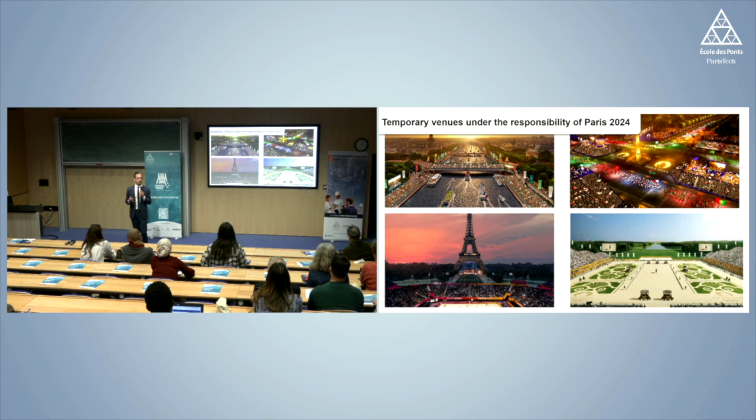So, for instance, along the Seine, we will have a lot of seats around the Concorde, around the Eiffel Tower. Those we don't do because they're temporary. So the organizers are doing that. We're only building whatever is permanent.

So those are the 70 projects I talked about, 4 billion euros, and half of that budget is the athletes' village in the middle. And that village is where all the athletes are going to stay during the games, and it's half of our budget.

We were created in 2017, and we're going to disappear in 2025. So we had about 6 years to do this, to spend that money, and I think it's about a third of the time that would normally be required to build so much. So it's been a lot of work, and we are going to disappear at the end of 2025.

We have about 2 years, a year and a half of reconversion to repurpose all those sites after the games for their long-term lives. I already talked about that, 4 billion euros of budget. About half of that is public money, the rest is private financing.

And we have a very complicated ecosystem, I would say French style. So we have 13 different public sources of financing, and then, as I said, about 30 project owners, because we didn't do everything ourselves, we delegated some.

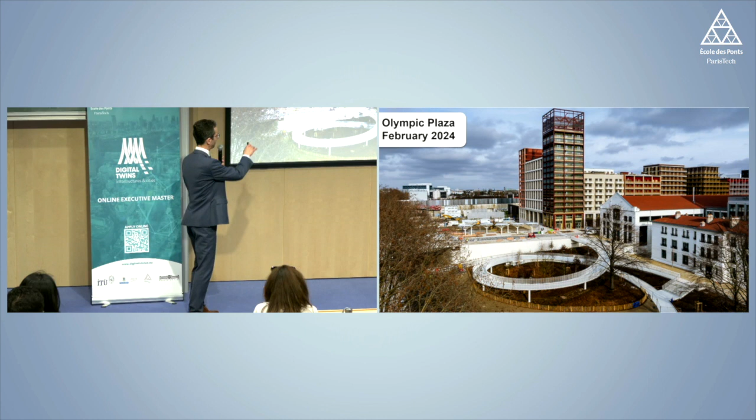So we built the entire village. That's part of the village here, and I like this picture because the topography of the site is very complicated. We have 15 meters of difference between the Rue d'Ampère and the Seine, and using the BIM CIM model, we were able to make sure that all the public spaces built were perfectly accessible to people with a disability.

And we decided to build a ramp here, and this is going to be the most famous part of the village. It's the Olympic Plaza, and we designed it to make sure that the path that's accessible is the nice path. So we put the money where we wanted everyone to go, including people with a disability. And you see it here on this ramp. So it's done. You have a couple of pictures here. That's just for the fun.

We have a couple of innovative features in our public spaces, and one of them is an air filter. We're filtering the air, we're not very far from the highway, to remove the smallest particles from the air, to try to create volumes of public space that have been depolluted.

We built a second village. It's in Dugny and Le Bourget, also in the northern suburbs of Paris. So it's here. And we're going to host here the media, the technicians who are in charge of broadcasting. You see a drone view of the village. Again, there was nothing 4 years ago.

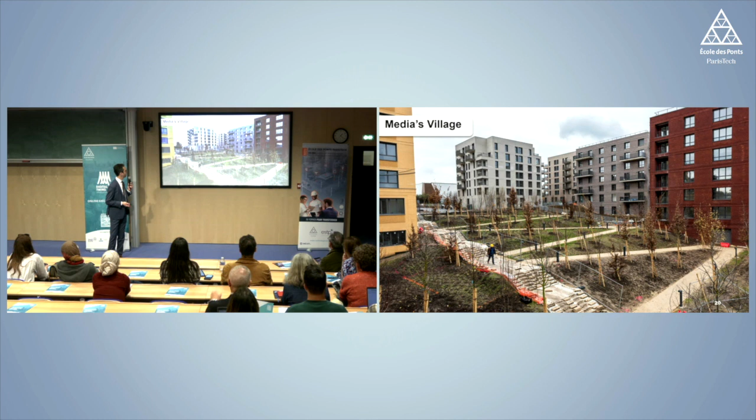We also have to build. This is in the Le Bourget airport, and this is going to be the broadcasting center that we also built for the games. And then a lot of competition sites. Arena Porte de la Chapelle was just finished last month, and you will see, here. So again, built from scratch. It's going to be for basketball during and after the games.

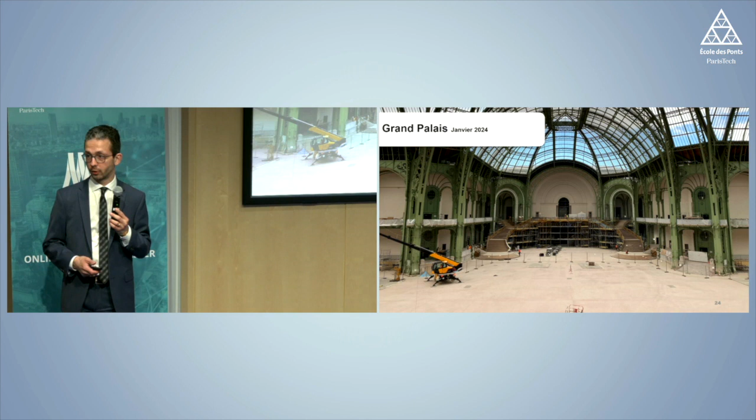The Grand Palais is under renovation, another competition site. It's not quite finished. It's going to be finished in a couple weeks. In Marseille, we built a couple new buildings to host the sailing competitions. And then very famously, we just finished the Olympic Aquatic Center across the highway from the Stade de France.

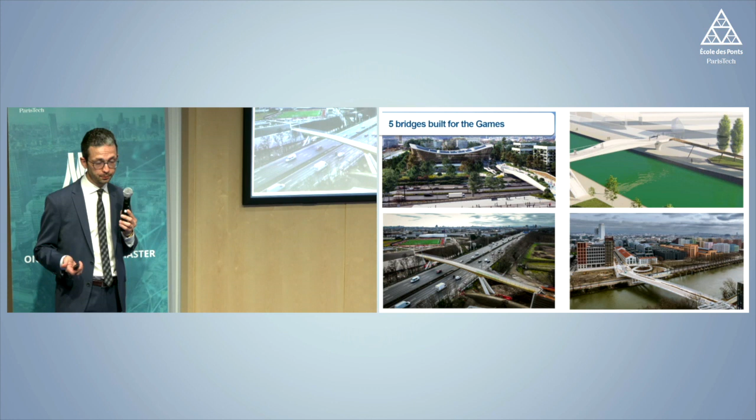And then we built a lot of other things, 8 swimming pools, mostly for training, because all the athletes have to train right before the site to warm up. We built several bridges. My favorite one is this one here. I think it's the first bridge in France made out of wood over a highway.

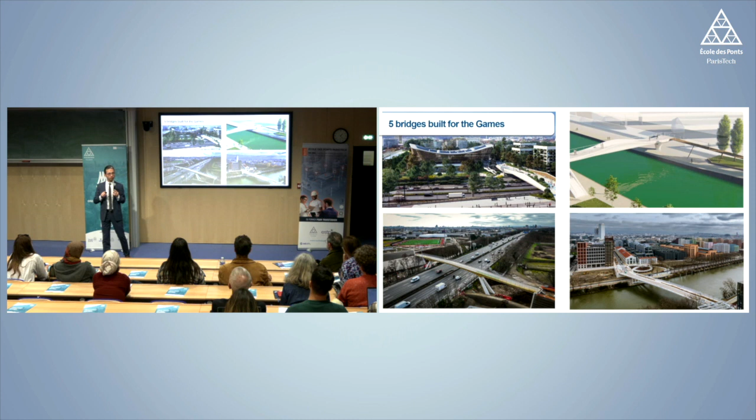Well, and how do we build this? So we built all of that in just 4 years. So here you have the athletes' village total, so the 40 buildings. And we had very high environmental ambitions, which we organize in 4 different aspects. And the first one is carbon neutrality. Well, it's the same thing. 4 different ways to reach our environmental goals.

The first way is that we have a reduction of about 50% of our carbon emissions. And we're going to talk about that. The BIM and CIM models that we use helped us make sure that the reduction in material consumption was enough to reach that level. And we also use a lot of wood, natural materials. All the buildings under 28 meters were built using wood, usually the structures or the frames and the floors.

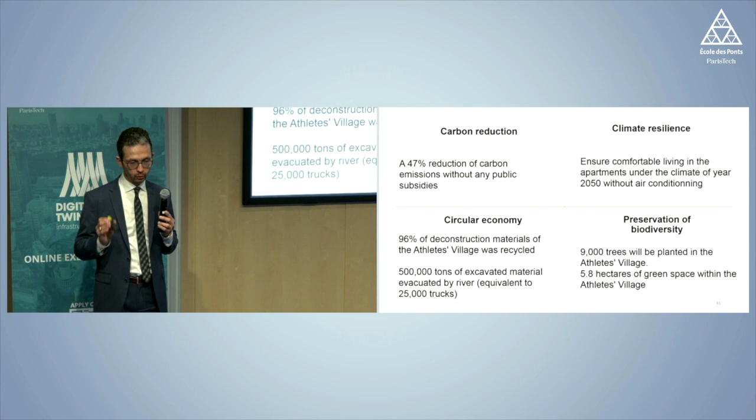Climate resilience, we had to make sure that we were building apartments that would be comfortable places to live in during the games, but also after the games. And Alexandre will also talk about that. We did a simulation to make sure that under 2050 climates, the apartments would be comfortable places to live in without air conditioning. We reused 96% of the deconstruction material, and we planted several thousand trees.

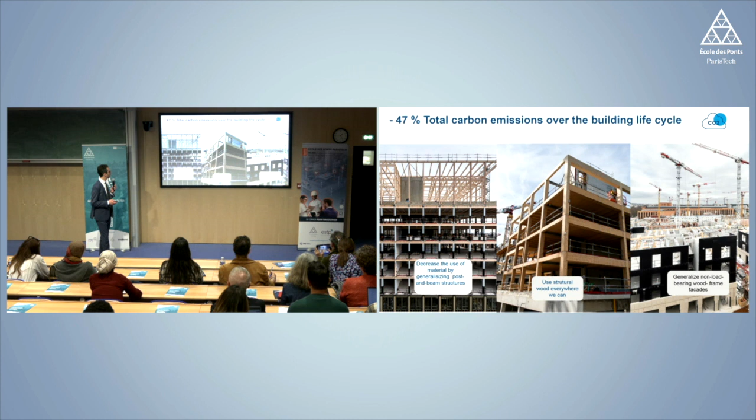So you see some of the buildings. That was a year and a half ago on the Athletes Village. You see the wooden structures of the buildings. We use ultra low carbon concrete when wood was not an option. We produced concrete on site to make sure that we had as few trucks as possible, even though there were 500 of them per day. And we built 10 kilometers of underground cooling, water and heating system. We went to get naturally cool water 70 meters underground.

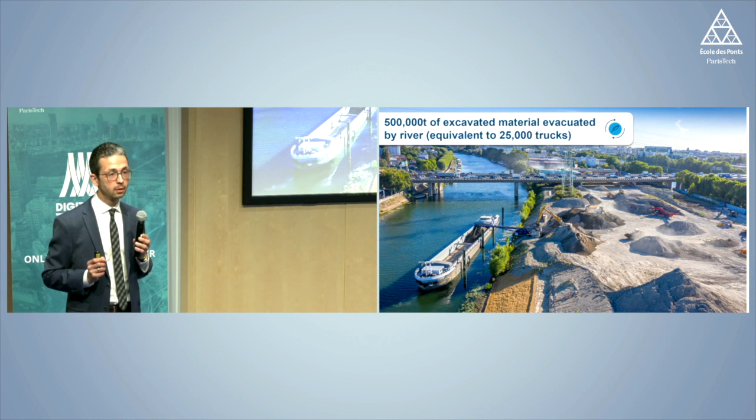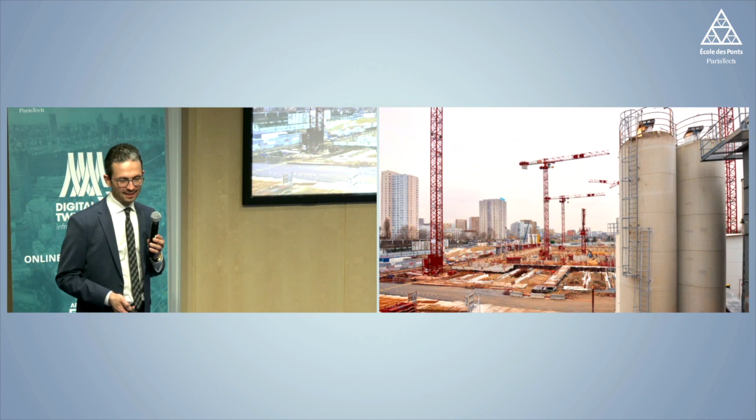Again, so that's the site when I took the job. That's what it looked like. So you see, that was in 2020, and then 4 years later, you have this. 96% of the material from this construction, and so this may be a weird picture, but it's a very important one. So all the athletes are staying in apartments, and after the games, those apartments are going to be available for sale, and they're going to be used by people like you and me. So you can buy or rent apartments in the athletes' village after the games.

But during the games, the athletes have some specific needs, and they don't need kitchens. So we didn't install the kitchens during the games, and we added another partition, another wall, to create another bedroom where the kitchen will be in the future. And so after the games, we have to remove those walls. So we have a little bit of repurposing, reconversion after the games, and 75% of the materials removed from the village will be upcycled, will be reused. 9,000 trees were planted, I already said it.

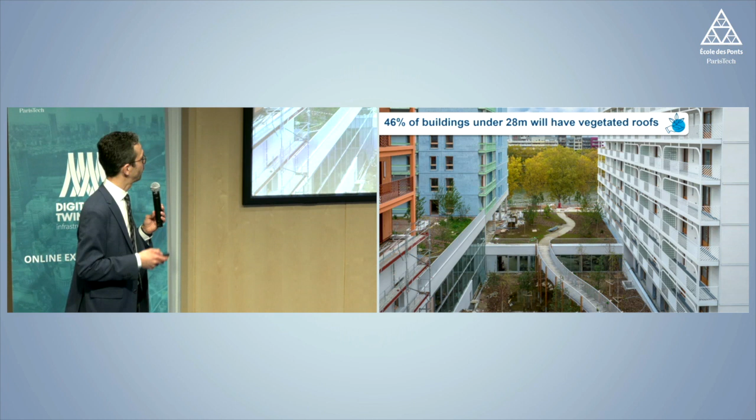Vegetated roofs, and then a lot of green spaces. So here you have an image of the village from the other side. And another important thing is that you want to build in a specific way, and for us, we had social values that we wanted to demonstrate through the act of building, and so we allocated over 10% of all the hours worked on our site to people far from employment.

In French, we call that insertion. So it's people who have been far from employment, and they go back to work. They join the labor force again, and 2.8 million hours were given to them. And then 37% of our contracts were awarded to small and mid-sized companies. We didn't want only the big construction companies to build. All right, so that's the introduction.

And then I'm going to give the mic to my colleague, Alexandre. Thank you. Thank you, Yann. I'm very happy to be here. And in the second part of this presentation, we will talk about the CIM BIM approach of SOLIDEO.

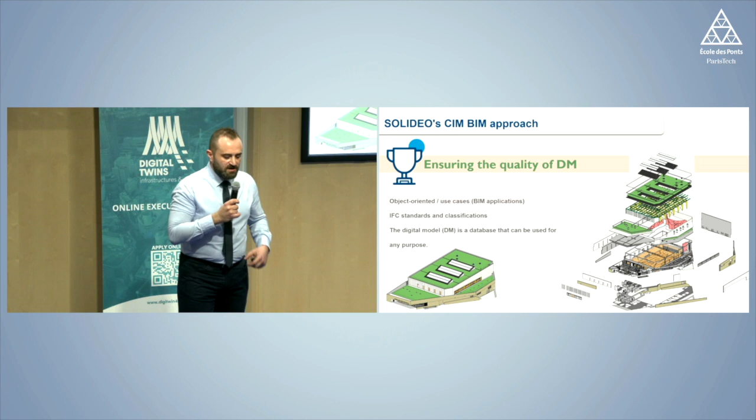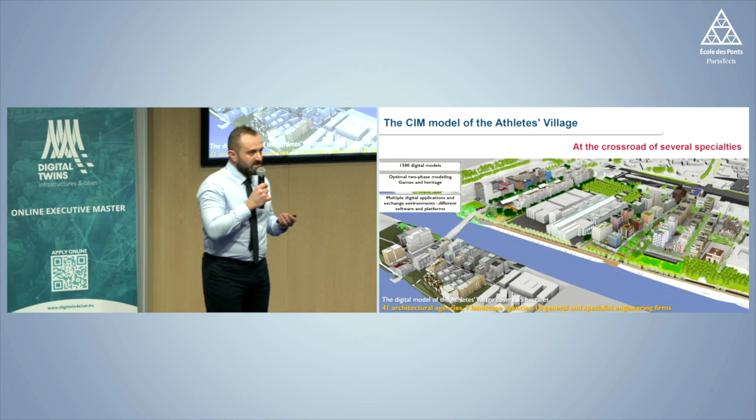So one of the examples is the digital model of the Olympic Village. This is a compilation of 1,500 models, and each model contains two phases, one for the Olympic Games and the other for the legacy. This model covers 65 hectares, and this is the largest BIM model in Europe. To create this model, we used a lot of applications like Revit, Archicad, or Tekla. Also, we used a lot of platforms to exchange the models. And this model was made by 41 architectural firms, 20 engineering agencies, and 7 landscape firms.

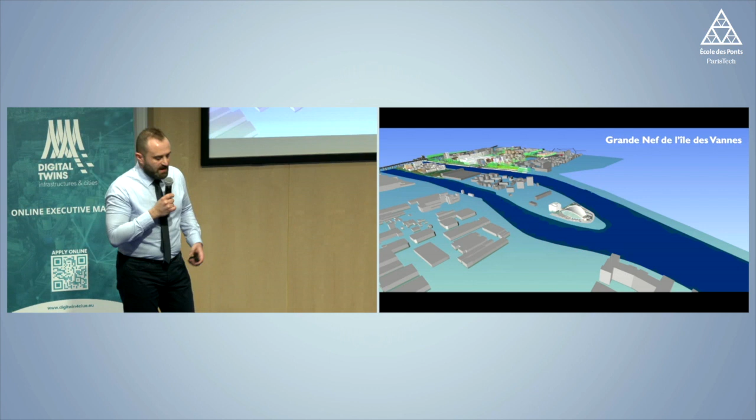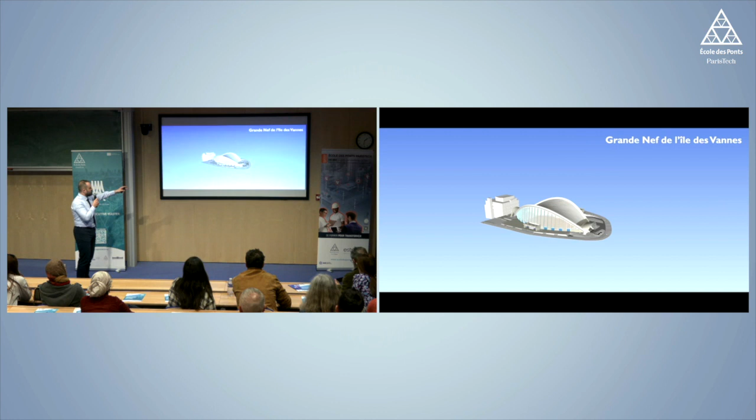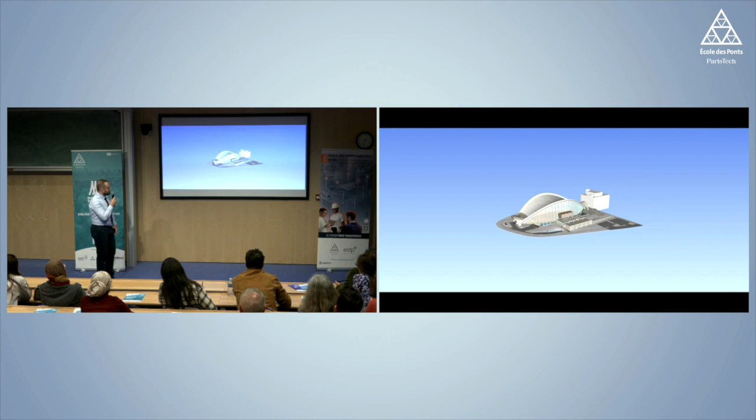And this is a small video showing you this model. So first of all, we can see the BIM model of La Grande Nef, located in Île-des-Vannes. We will talk about this model later. And it will be a training site for the athletes. And here, we can see the gymnasium of Pablo Neruda. It's a renovation project, and it will be used by the inhabitants after the games. It's not an Olympic project. It's for the inhabitants after the games.

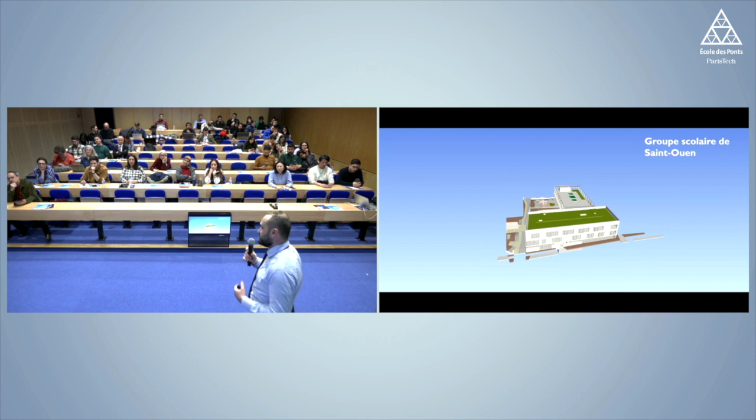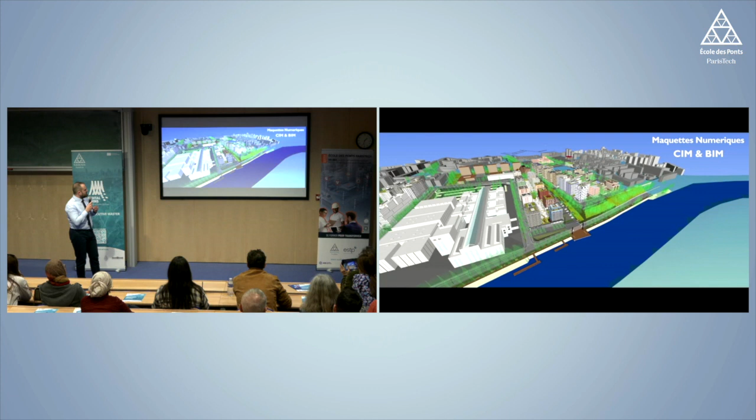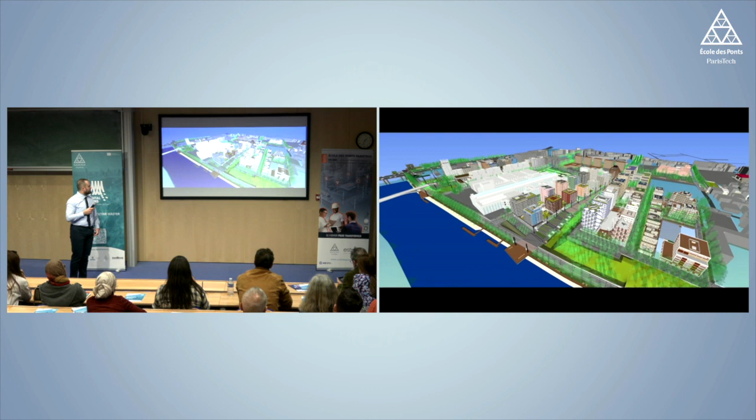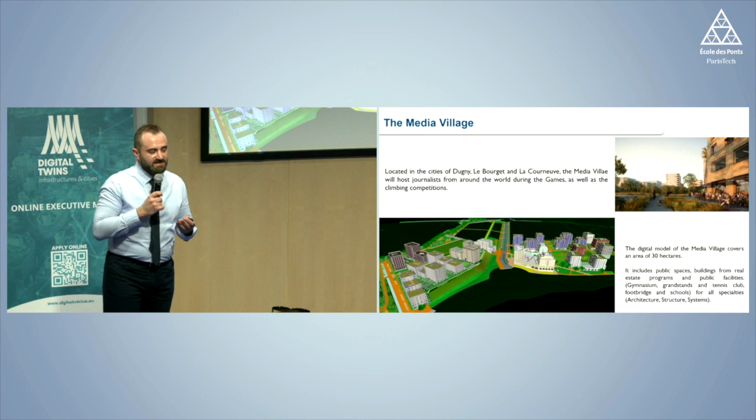And here, the school of Saint-Ouen. It's a new project. Also, it will be used by the inhabitants after the games. And this is a complete view of the digital model of the Olympic Village. For the same objective, we created the model of the media village. It covers 30 hectares, and it includes a digital model for public spaces and buildings.

And this is a LIM model, landscape information modeling. We did it for the project of Colline d'Elancourt. This project will host the mountain bike (VTT) competition. And this model covers 52 hectares. Actually, it's one of the rare LIM models in France.

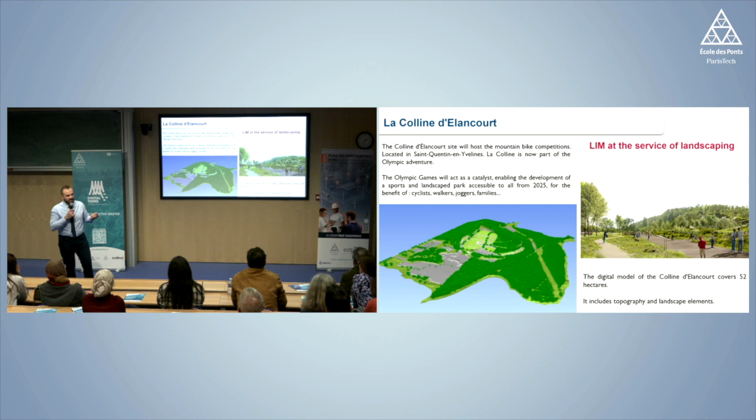For La Grande Nef, for this project, we created a complete BIM approach. It means the BIM process started from the programming phase. And for that, we created a kind of 3D model with a 3D scanner. We called it, as you know, the point cloud. Then we created the BIM model.

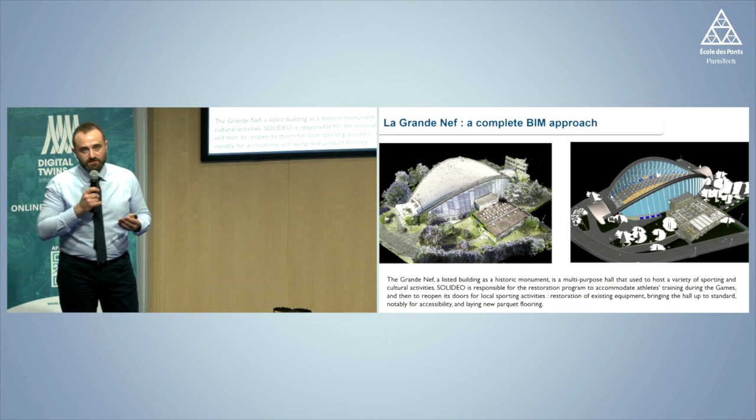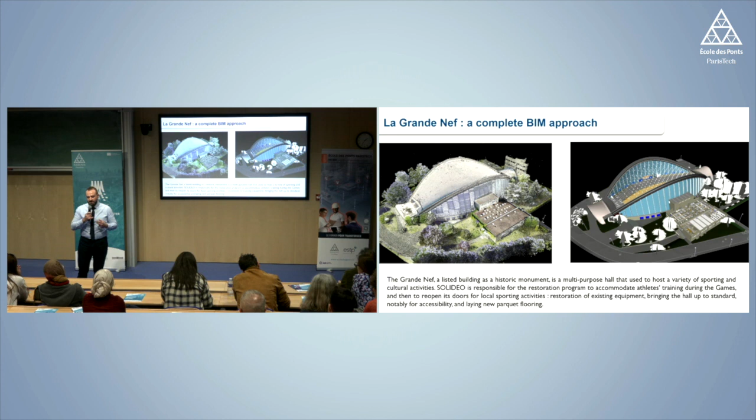Actually, it was very useful for the architect because when we started this project, it was the COVID period. So with these two models and 360 images, the architect and the engineers had a database on their computers because, as we know, it was very complicated to go to the construction site at that time.

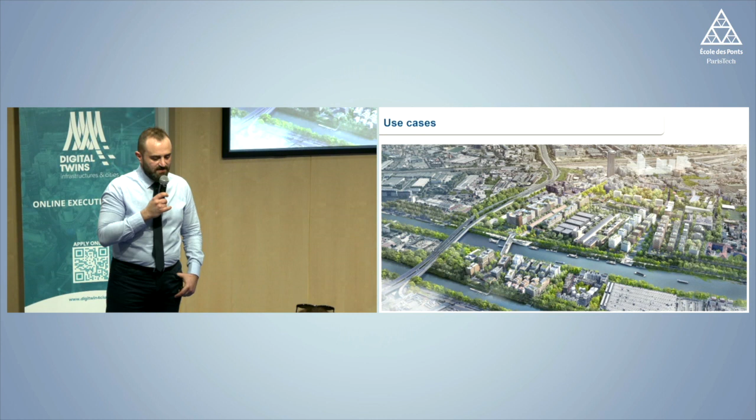So now we will focus on the use cases. As we all know, some use cases we know, and we know how we do them now, for example, the production of blueprints or the plans, facades, and sections. But SOLIDEO was a pioneer for some use cases.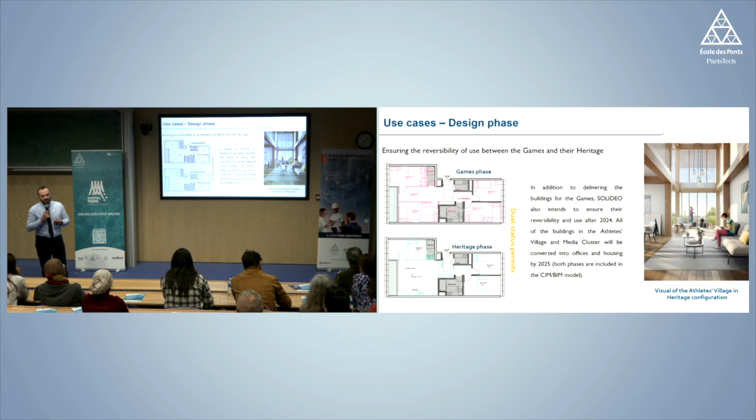So, our pioneer use cases: first of all, the integration of the two phases in the same model. Each model contains the two phases, the first one for the Games and the other one for the heritage phase. Second, we use the BIM model to analyze the architectural quality of each project.

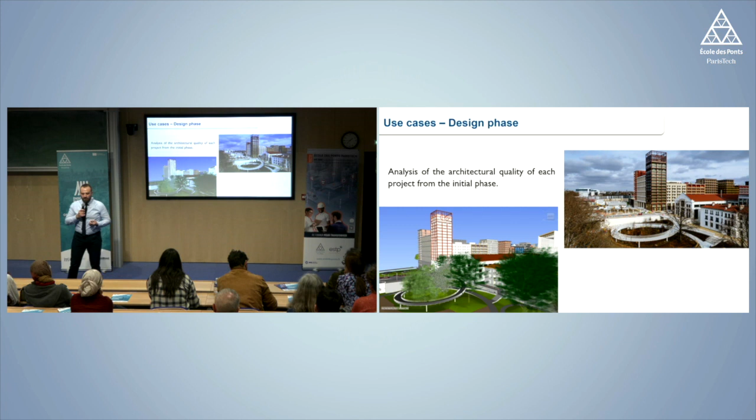So I would like to focus on this point. We had this illustration in 2019, and that's what we have now. So we can see the reliability of the digital models.

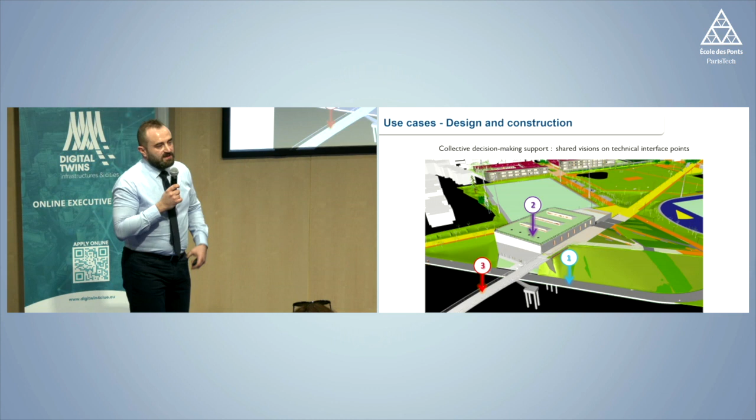Also, we use the digital models to make a kind of analysis of interfaces between several projects. Here we have a very significant example. In this example, we use the digital models to ensure the technical synthesis between the bridge, A1, the public spaces, and the gymnasium of Le Bourget.

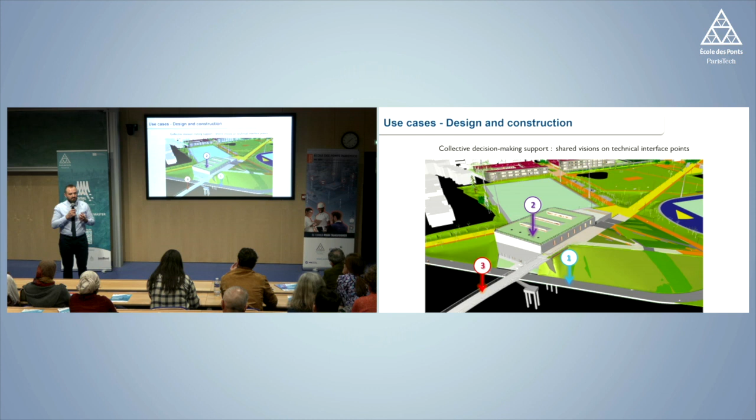This interaction between these three projects was very complicated, especially since the group of architects doesn't have a contractual interface point, so we use the digital model to analyze the interfaces.

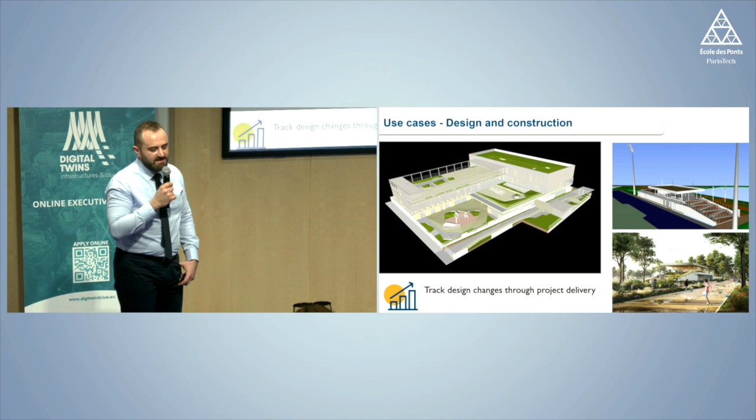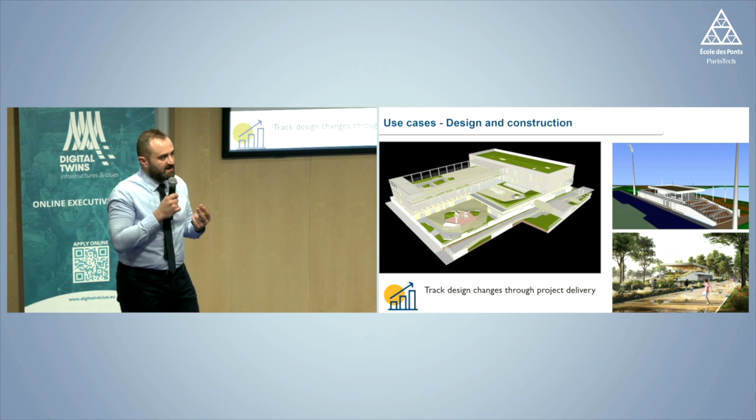Also, we use the models to track design change through phases. As we know, all projects go on and evolve. So we use the 3D models to show the evolution of each project and the changes between the phases.

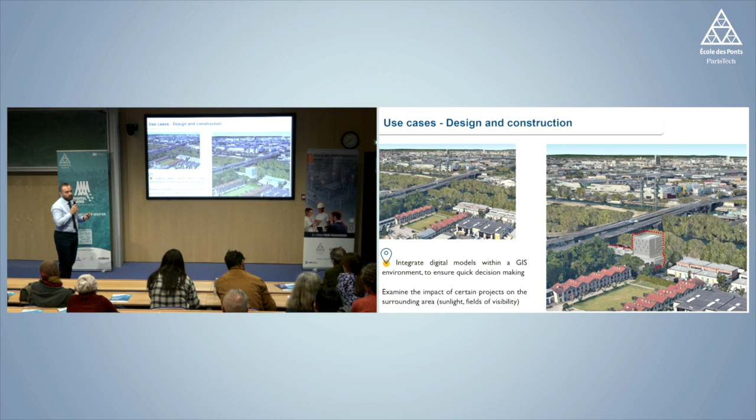Also, we use this workflow in programming phases for some projects, and for one project we had 3 months of gain, especially to define the variant that we will use.

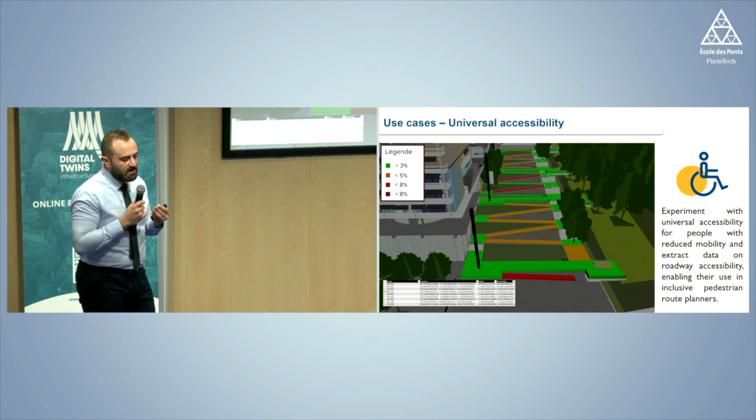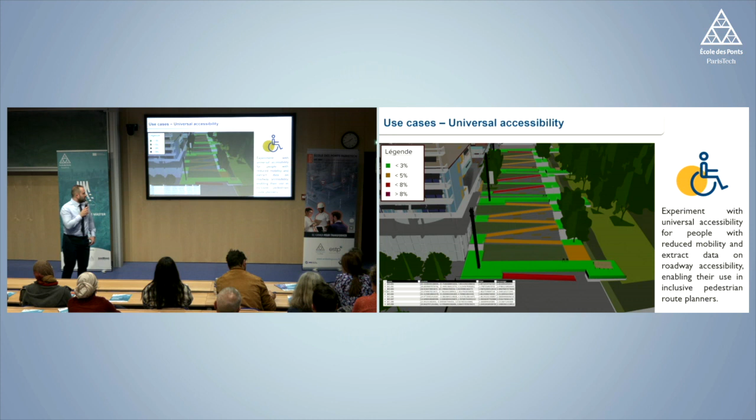A new use case of digital models is related to universal accessibility. Actually, we make all the analysis of universal accessibility within digital models. Also, we are developing a platform now to calculate the mobility and extract data for this object, for accessibility.

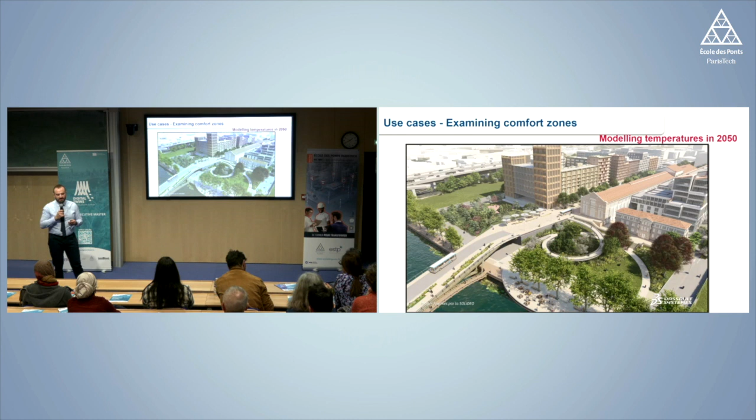We also use the BIM models or CIM model to make a lot of simulations. For example, this simulation was built by SOLIDEO and Dassault Systèmes to make analysis examining the comfort zones. Here we can see the village, and here we can see the simulation of the impact of heat waves on the village. And here we can see the sunshine on the elevation of the buildings.

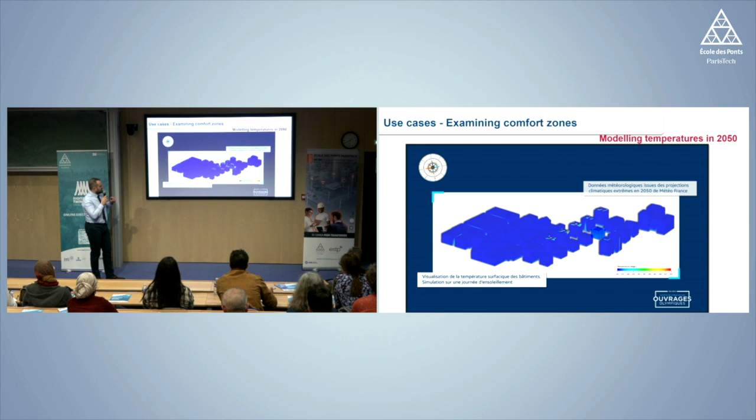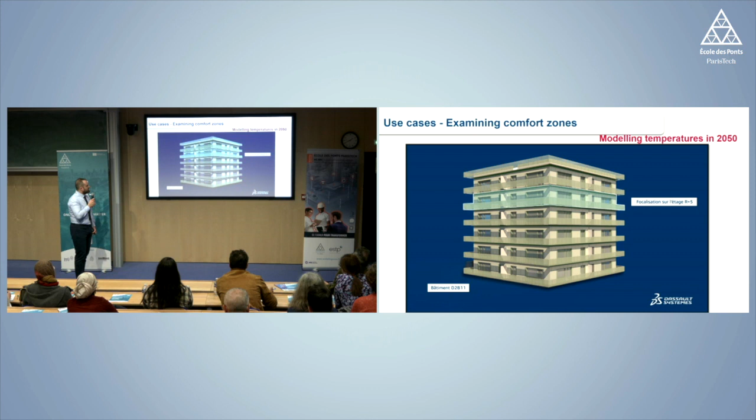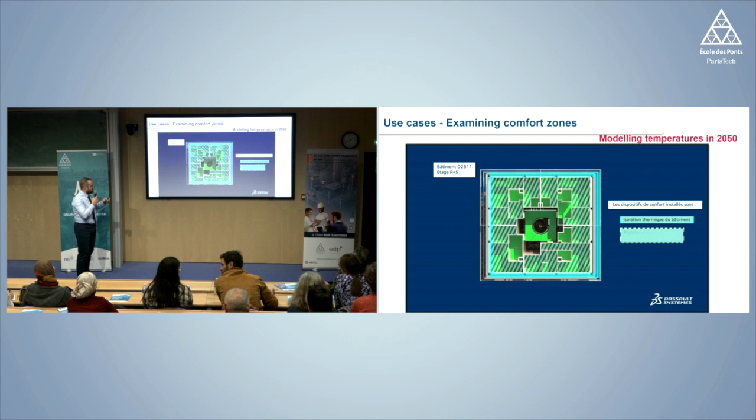Then we take one level of this building and we made the simulation inside the apartments. So we focused on the 5th level. As we can see here, the temperature inside the apartment is almost here. So this is the temperature inside the apartment during a heat wave period.

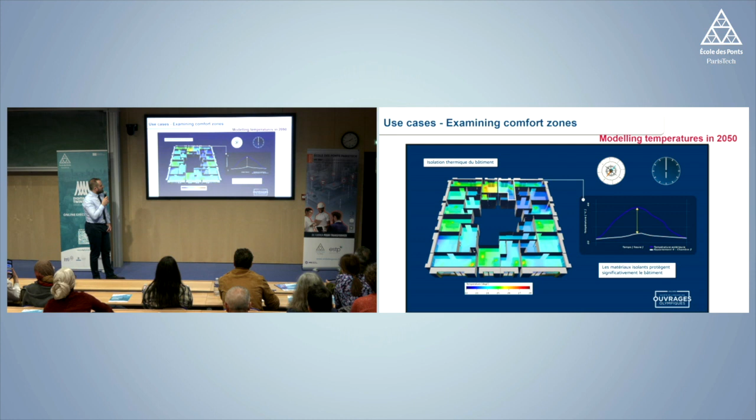And here we made a kind of comparison for the same apartment with under floor cooling and without this under floor cooling.

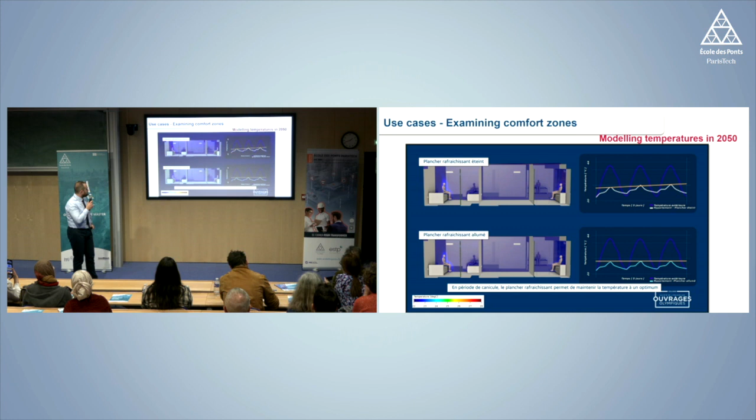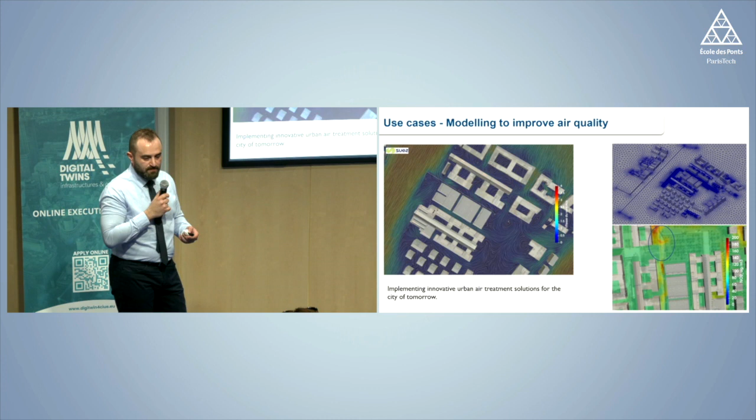Then we use the CIM and BIM models to make another simulation to define the location of the innovative urban air treatment. And we did this simulation with the group Suez.

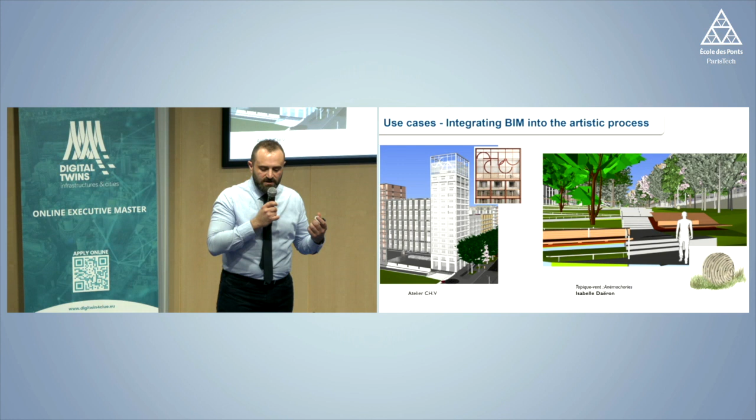Also, we integrated the BIM process with the artists, for the artists. Here we can see 2 examples. Actually, we use the digital model of the Athletes Village to make the artist understand the different levels of the project, because with plans it's not very visible. So we use the 3D models. Then we integrate the artwork of the artist, and we examine the different viewpoints of each artwork.

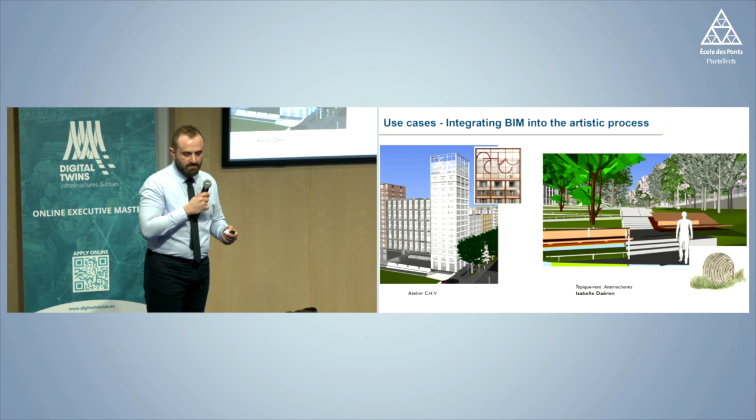Another use case related to our ambitions is the use of the 3D model of the village to examine the visibility or the field of view of each security camera, by integrating a BIM object of these cameras with the digital model of the village.

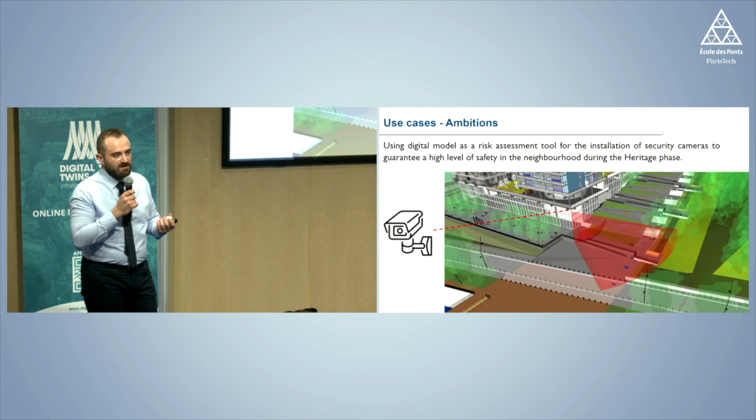Also, we use the CIM and BIM models for communication and public consultation. Actually, in 2021, we created a digital platform to show the inhabitants the future Athletes Village, and the inhabitants could participate in the design of public spaces.

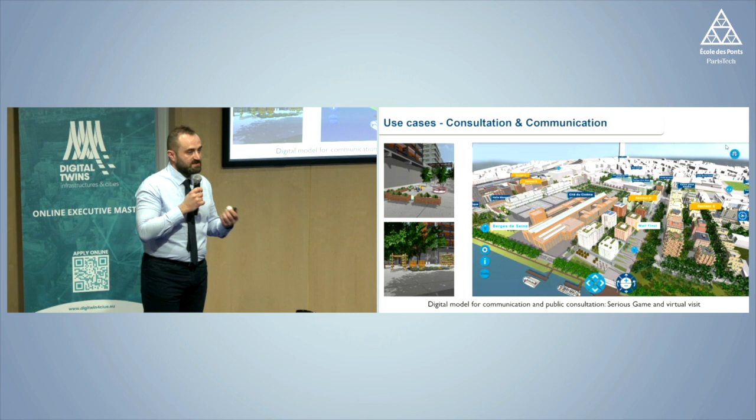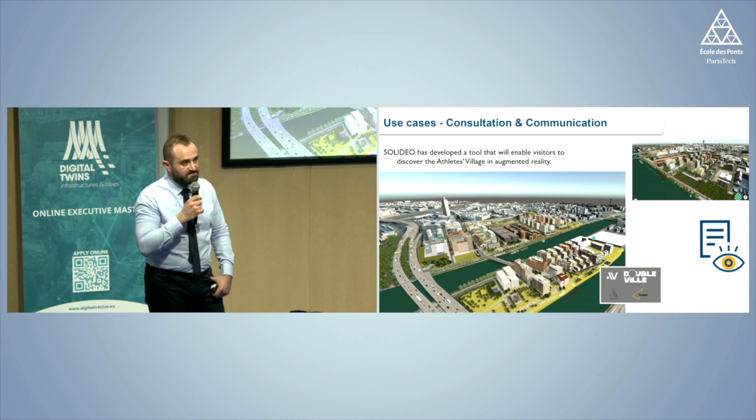And now we have just finished the development of the augmented reality of the village. So we can see the future buildings and the future public spaces. As we can see, it's just a screenshot. These models have a lot of quality, and it is due to the BIM models. Actually, we use the same BIM models of the architects. And to finish, let's see the last video.

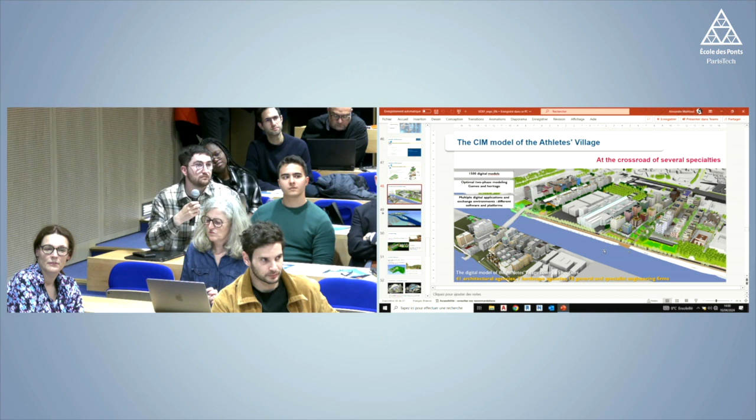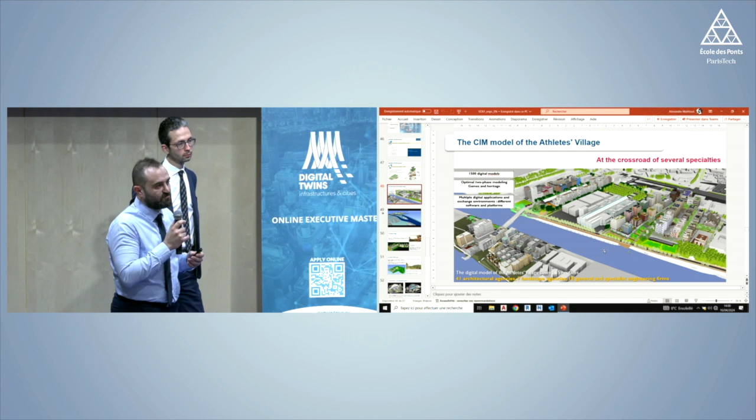For the Cité du Cinéma, it's an existing building, so we made the 3D model for the outside of the building, just the facade and elevations. We didn't model the inside of the building. We don't use it, so we don't need to model it.

Thank you for your presence today and for this presentation. I actually have 3 questions. Should I start one by one?

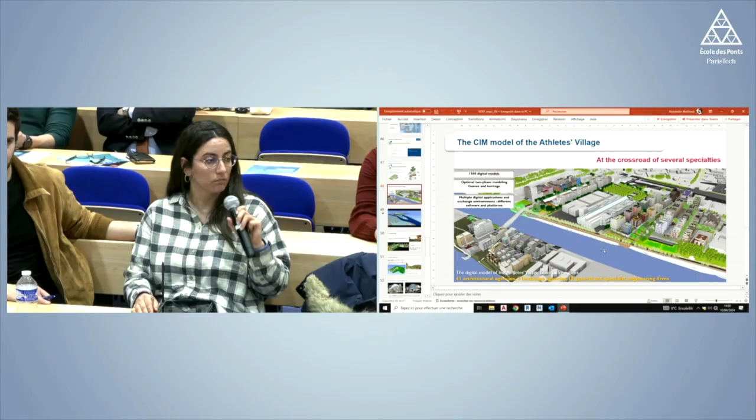Okay. So the first one, did you use the BIM CIM process for the demolition part before you started construction, maybe for the study process? Yes, actually, to explain it, in this project we have 5 sectors, and each sector is built by a contractor. So yes, we used that for sector D, in the demolition phase and preparation of the construction site.

Okay, thank you. Another one is how much time did the study phase take before starting construction? It depends on the projects, but for the public spaces, it was very short. I think the total design development phase and preparation of the request to bid for the construction companies took a total of 3 months. 3 months, it's very short, using BIM. But if I may, without using BIM, how many years would it take?

I don't know. We are often asked whether the BIM CIM approach makes projects slower or faster, but we don't know, because for us it was obvious that we would have a BIM CIM approach, and when we talk to architects, engineers and construction companies, we don't have a clear answer. Some say it helped them, and some say it was a big step, and they had to bridge that gap.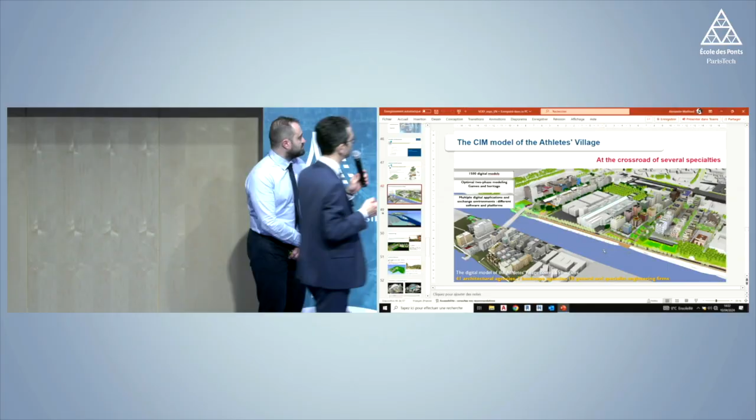But I'm going to quote one of the architects who designed about 12 buildings here. She's pretty famous, but I'm not going to say who she is. Her architectural firm has about 20 architects. She was awarded that part of the village, and the entire agency switched to BIM all at once. She trained all of them, and they all jumped into the BIM world.

And so she's very thankful, because we helped her turn around her agency and convert to the BIM CIM approach. But we have other agencies, maybe bigger, and they had a harder time. Okay, thank you.

One last question. For this project, you spoke about 2 digital models, one for before and one for after the Games. So you started with one model and then created another one, or you worked on the same one but in a copy?

For the native files, we have the 2 phases, the games phase and the heritage phase. The native file means the Revit or Archicad file. Then for the IFC, we have 2 models, one for heritage and one for games. But anyway, we use the same Revit or Archicad file to produce the 2 phases.

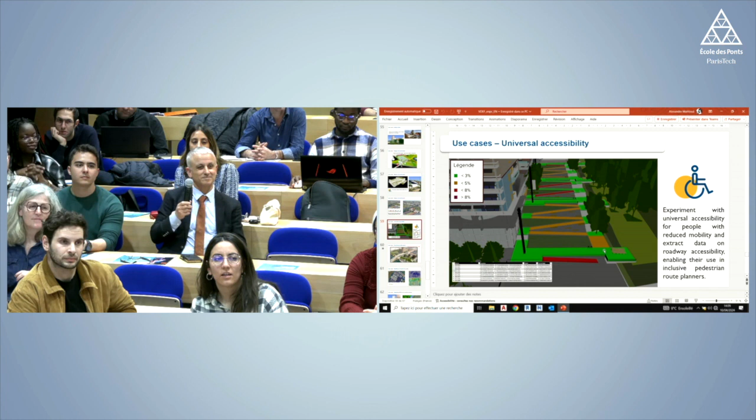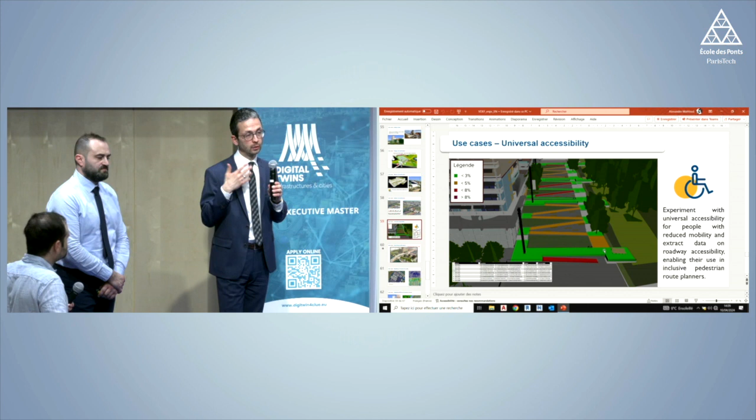We have signage. It's not on the model. We have signage that will help you, whether you're blind or you don't hear well or you don't see well. You don't have to be blind. You can just not see well. So we developed a signage, signalétique multisensorielle. So it's a signage that's adapted to all types of handicaps. So yeah, it's very important, and I guess we didn't really develop that here.

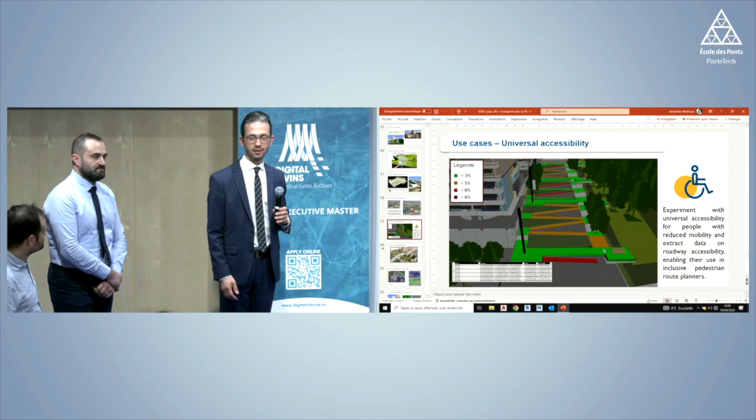When we talk about BIM and CIM, we are mainly talking about the information contained in digital models. How to manage information through multi-scale, building to city. When we talk about BIM, building information modeling, and city information modeling, how to manage the... How do you connect the two? Yeah. Le passage d'information entre le multi-échelle, du BIM au CIM, du building à la cité.

For us, BIM is almost building information management because we are working with the data. So when we make the same process outside the building, we are talking about CIM, City Information Modeling. It's just a difference of scale of the model: inside the building BIM and outside it's CIM. But we have the same approach. So when we get a BIM model or a CIM model, it's the same. The two firms, the landscaping firm or the architectural firm, have the same requirements they have to give us.